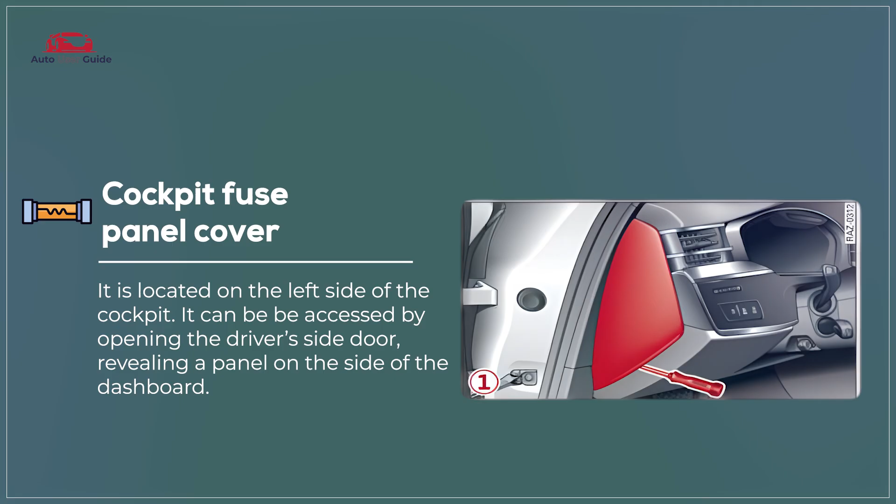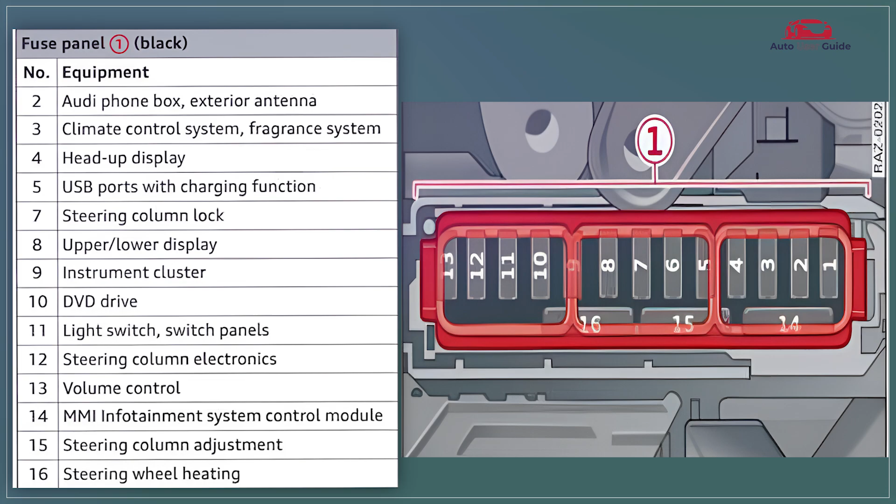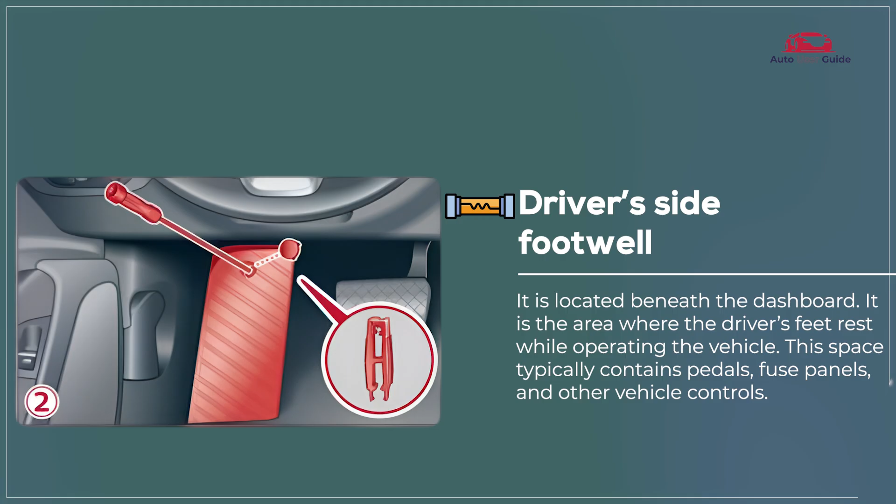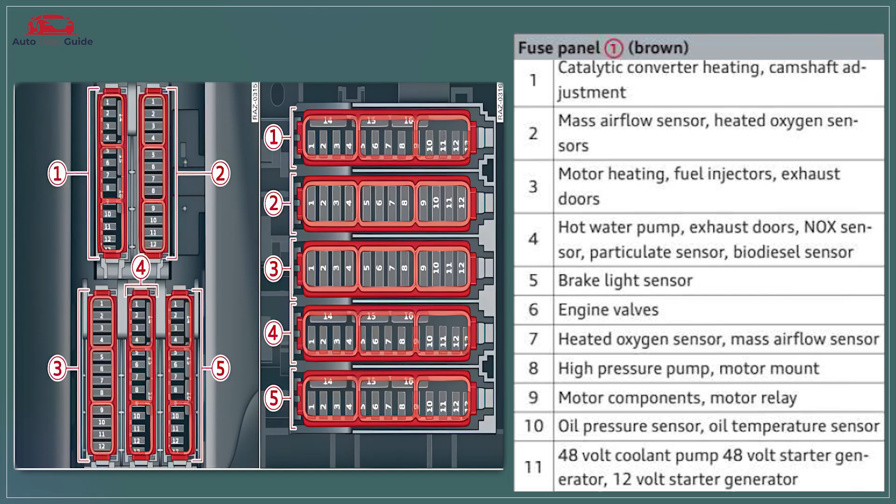Driver's side footwell. The driver's side footwell provides space for the driver's feet and pedals, ensuring comfort and control. It often houses important components like the fuse panel, wiring, and sometimes the vehicle's control modules. The area is designed for easy accessibility during driving.

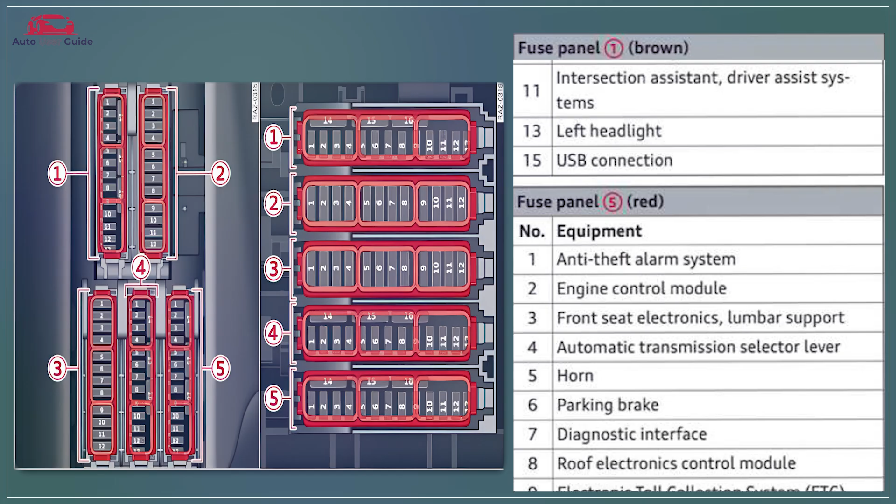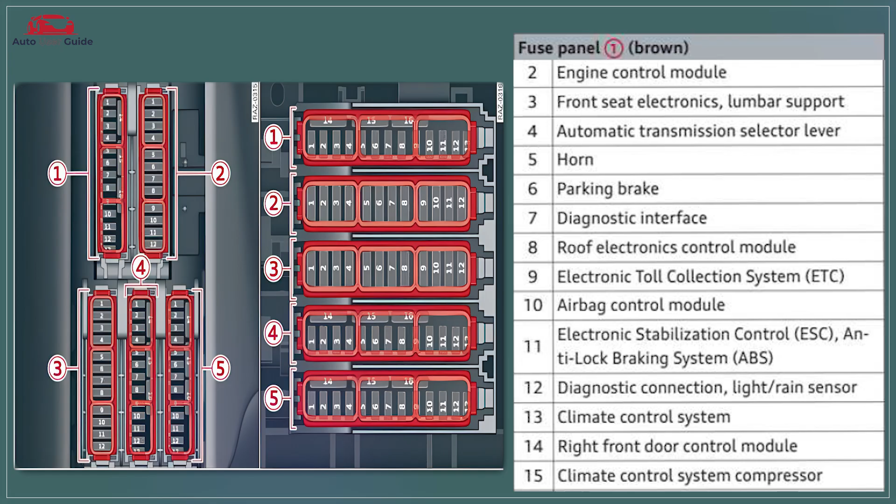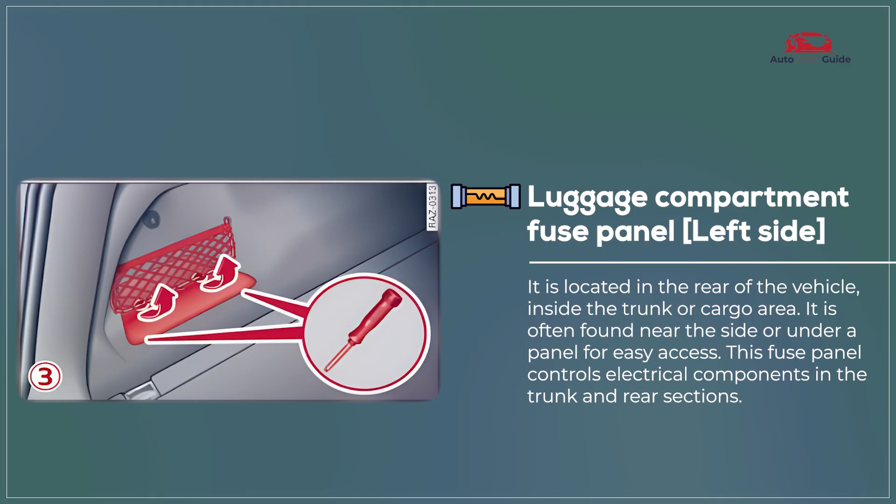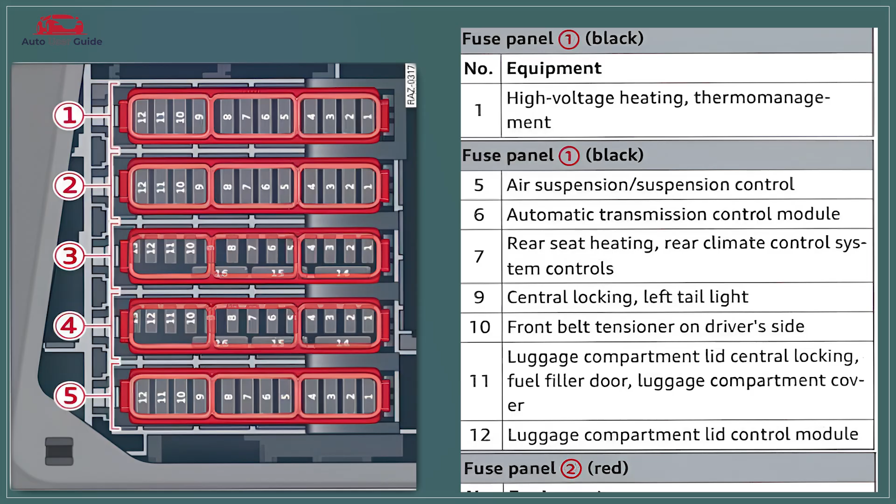Luggage compartment fuse panel, left side. The luggage compartment fuse panel protects and controls electrical systems in the rear of the vehicle, such as lighting and power outlets. It is designed for easy access and protection from damage. The panel typically includes fuses and relays for rear components.

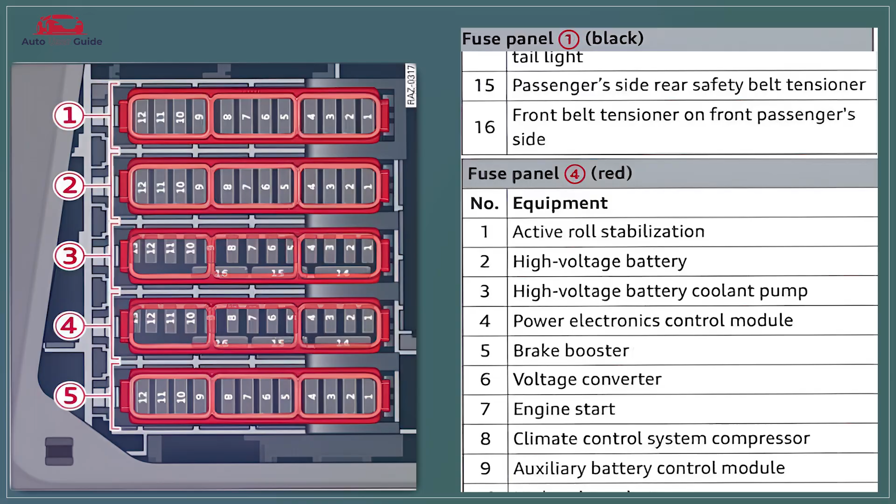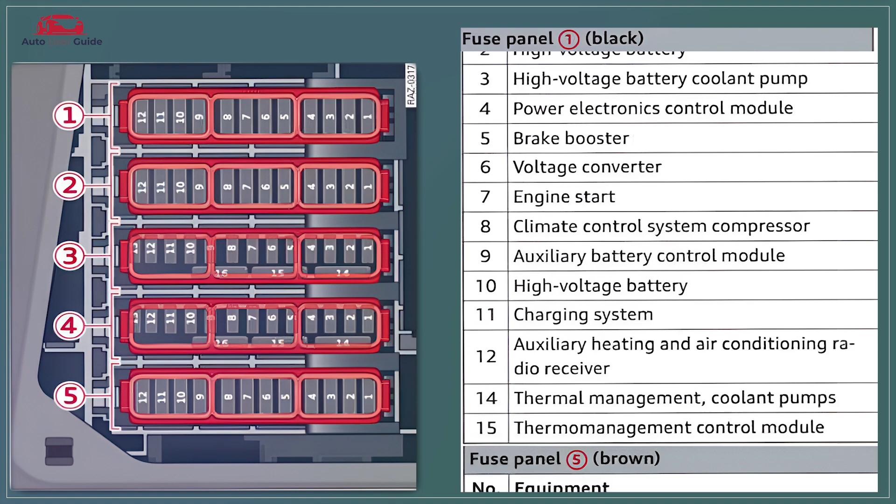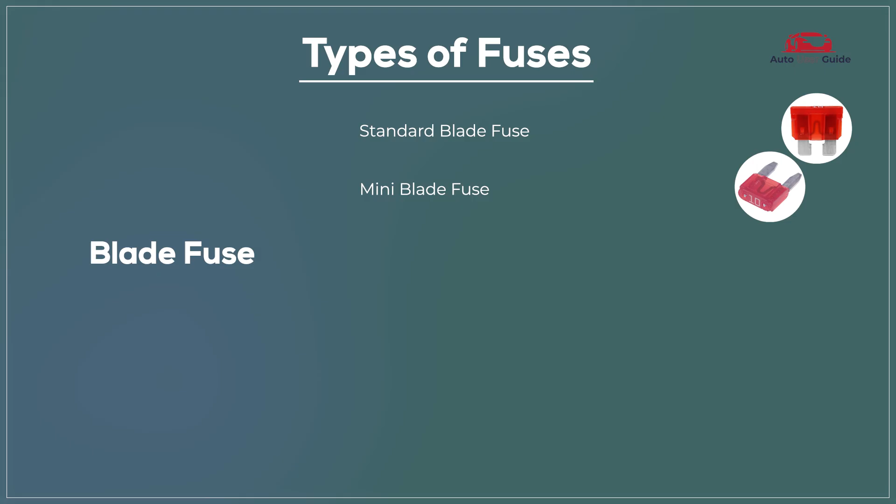Types of fuses: blade fuse, standard blade fuse, mini blade fuse, maxi blade fuse, micro 2 fuse, micro 3 fuse, J-case fuse.

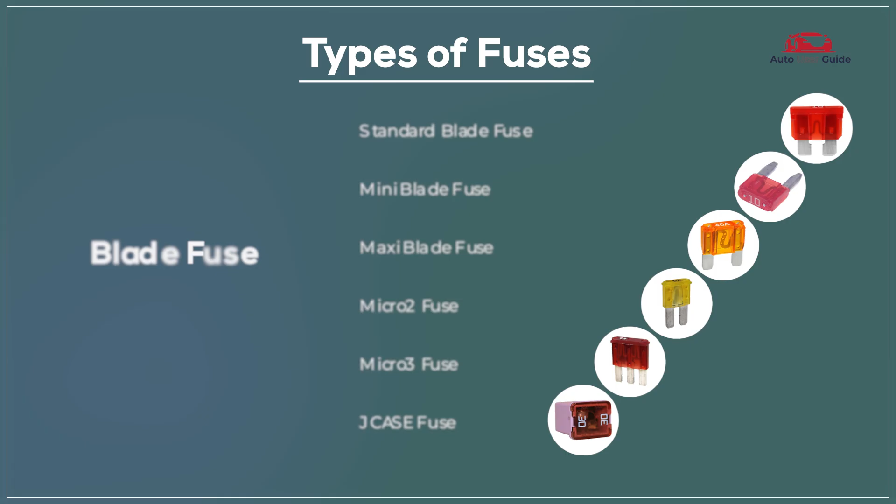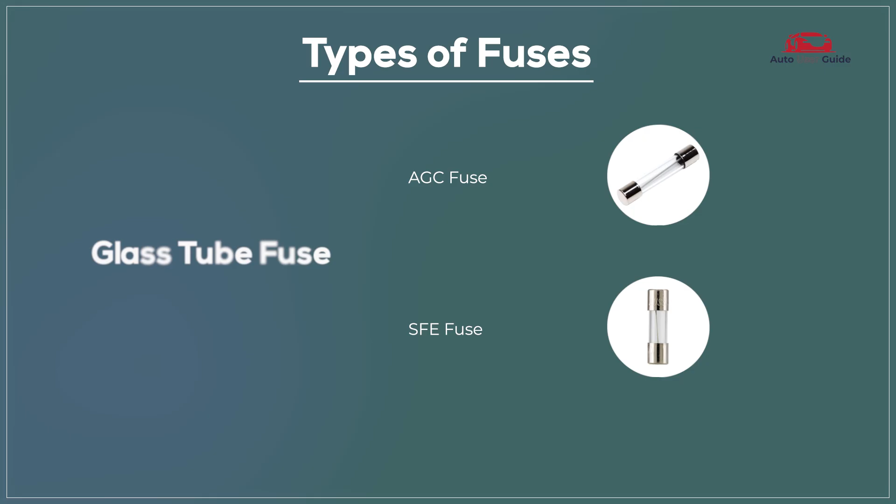Ceramic fuse, Bosch fuse, DIN fuse, PAL fuse, low-profile PAL fuse, standard PAL fuse, link fuse, mega fuse, high amperage link fuse.

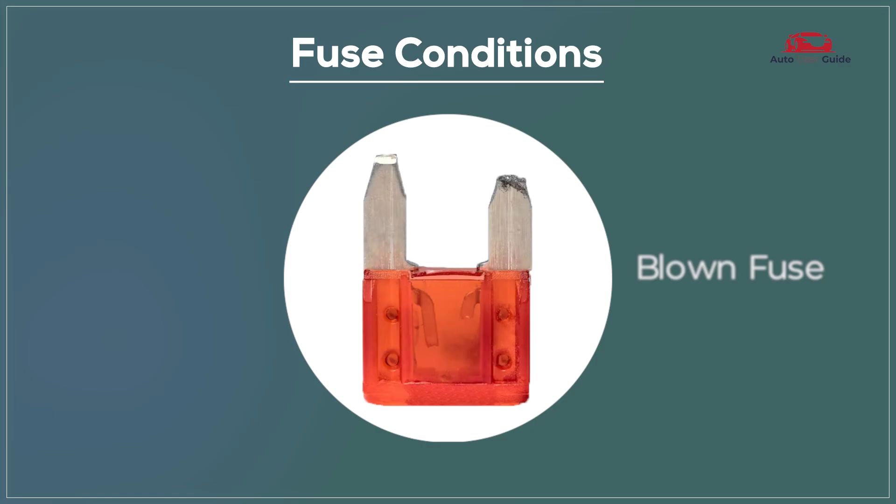Fuse conditions: blown fuse. A blown fuse means it's no longer functioning and needs replacement, while a perfect fuse is in good working condition and performing as expected.

How to change fuses: turn off the vehicle, locate the fuse box, identify the faulty fuse, remove the faulty fuse, inspect and obtain a replacement, install the new fuse, test the replacement.

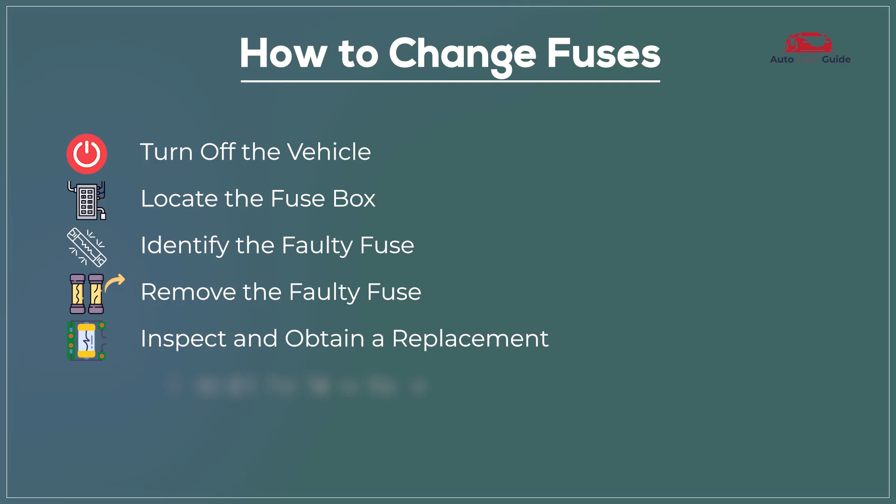Safety precautions: disconnect the battery, wear protective gear, use proper tools, check for correct amperage, avoid water exposure.